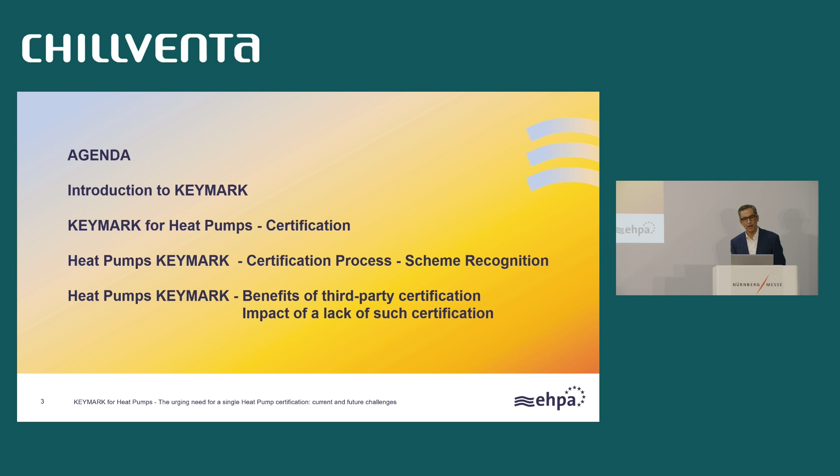We are going to speak about certification today and the importance of certification in the context of having a larger and wider European market, so it's important to align as much as we can. To illustrate certification, I will speak about the KEYMARK as a brand, what the KEYMARK concept is, and then specifically about the KEYMARK for the heat pump sector. I will then explain briefly the certification process and the scheme recognition, and then we'll jump to the benefits of third-party certification and the impact of a lack of such certifications.

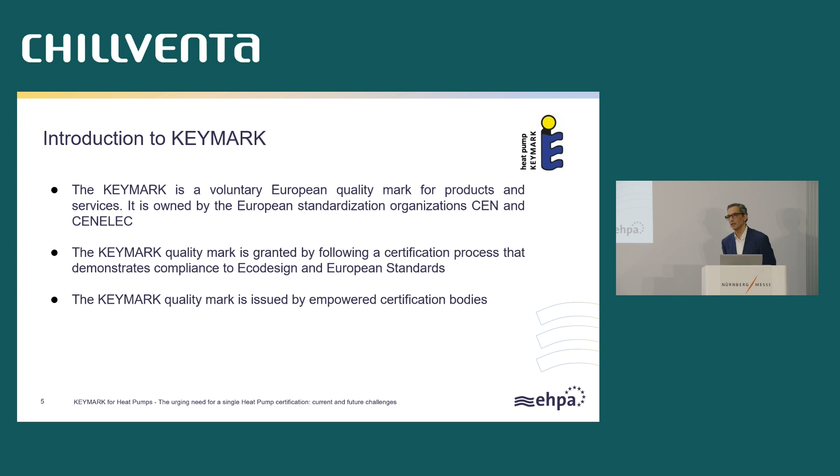So what you need to know about the KEYMARK: it's a voluntary scheme, a European quality mark for products and services, owned by the European Standardization Organization. The quality mark is granted not just as a piece of paper, but following a certification process that will demonstrate compliance to eco-design and European standards, and this compliance will be delivered by an empowered certification body.

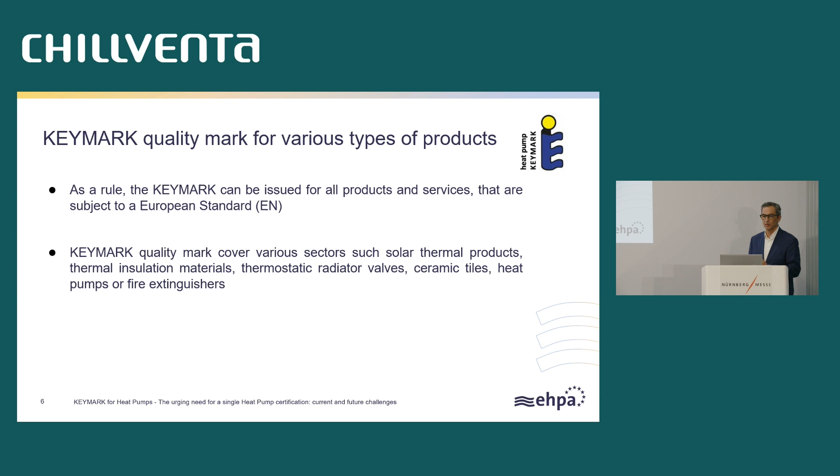The KEYMARK, when it was developed almost two decades ago, was really meant to cover any product or even a service. The only condition for the KEYMARK to be established is that there is a European standard that can cover the specific product or service. As a result, the quality program KEYMARK covers different products - it can be a valve, a radiator valve, solar equipment, insulation equipment, and of course, heat pumps.

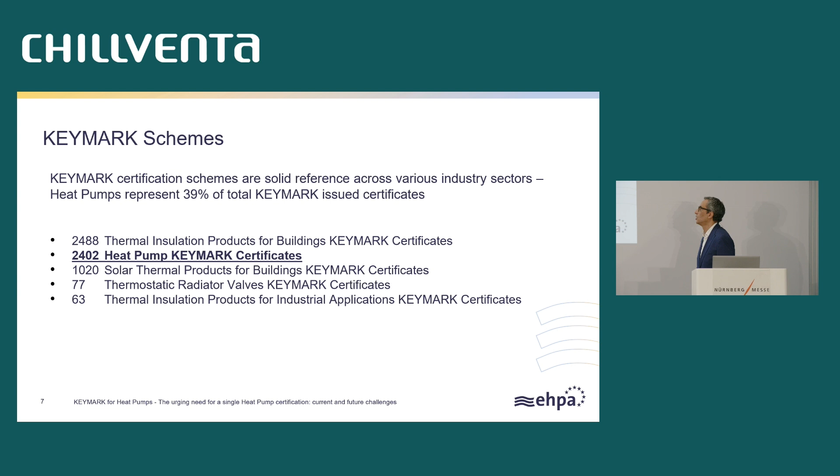Today the KEYMARK is quite developed. It was implemented by CEN and CENELEC two decades ago, and today we have thermal insulation and the heat pump KEYMARK, which is catching up and almost passing thermal insulation in terms of number of certificates issued. So the KEYMARK is very strong for our sector in heat pumps. We also have solar thermal products, thermostatic radiator valves, and thermal insulation.

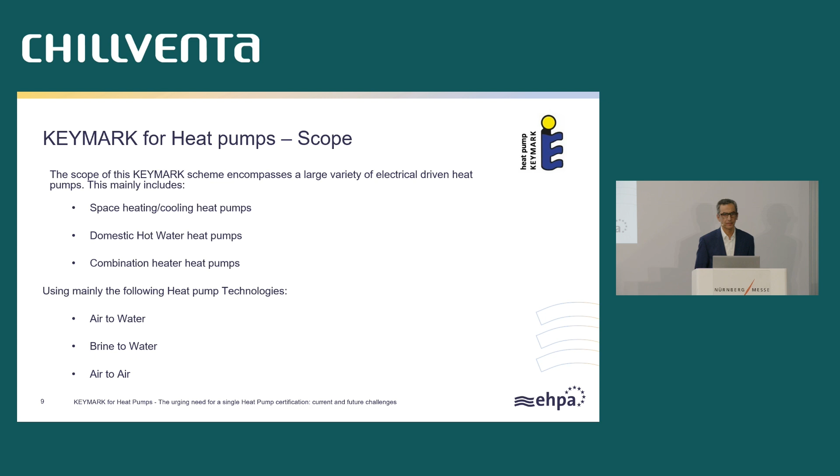In general, the testing types - we will see the standards we refer to in the KEYMARK - but the testing in general, performed through third-party testing, needs to be compliant with the requirements of Eco-Design Lot 1, 2, and 10. Depending on the application and type of heat pump, you can have specific tests about space heating, space cooling, hot water tests, sound power tests, and operating tests.

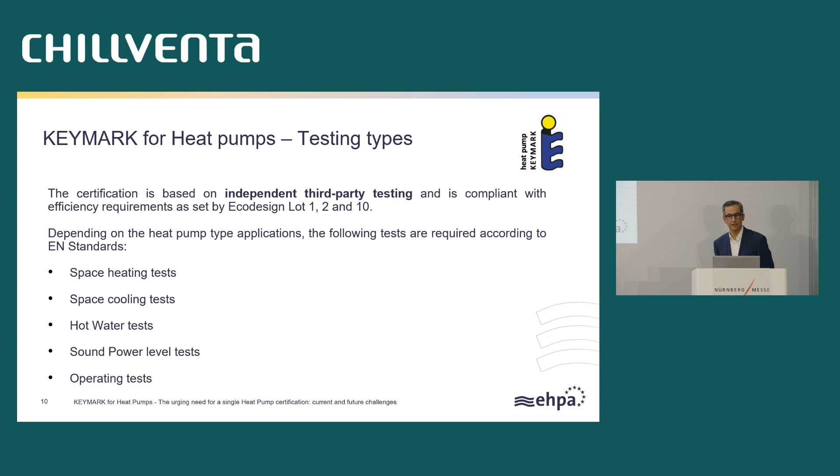As I said earlier, these tests are conducted by laboratories that are ISO 17025 accredited. So only accredited laboratories empowered by certification bodies can do the tests and have their test reports valid. For certification bodies who are accrediting the laboratories, the certification body needs to be ISO 17065.

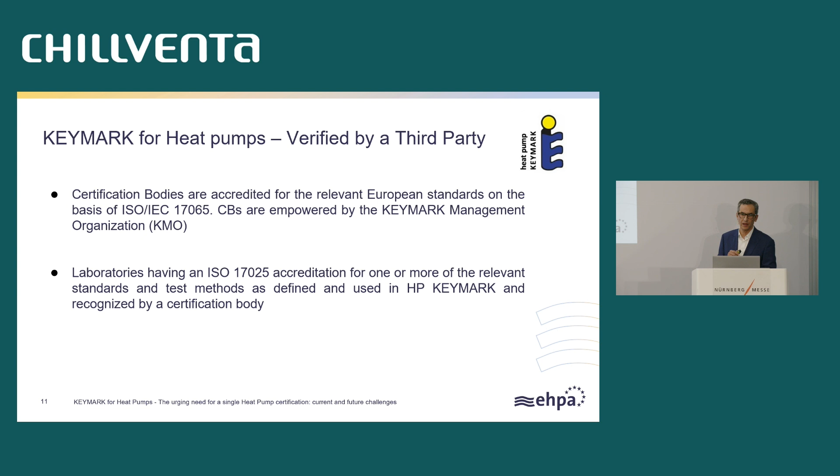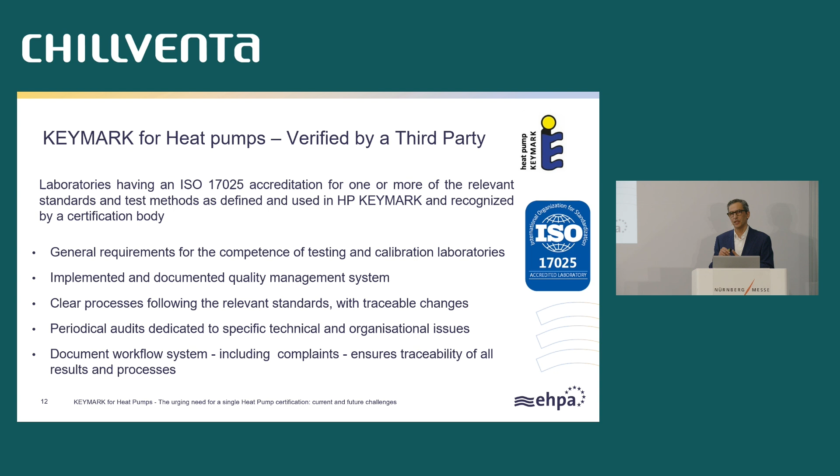For specifically the laboratories used in the KEYMARK scheme, they are 17025 certified, and they go through different processes as dictated by ISO 17025. They need to go through competencies, calibration of the laboratories, documentation, traceability of the test reports, and all documentation regarding complaints.

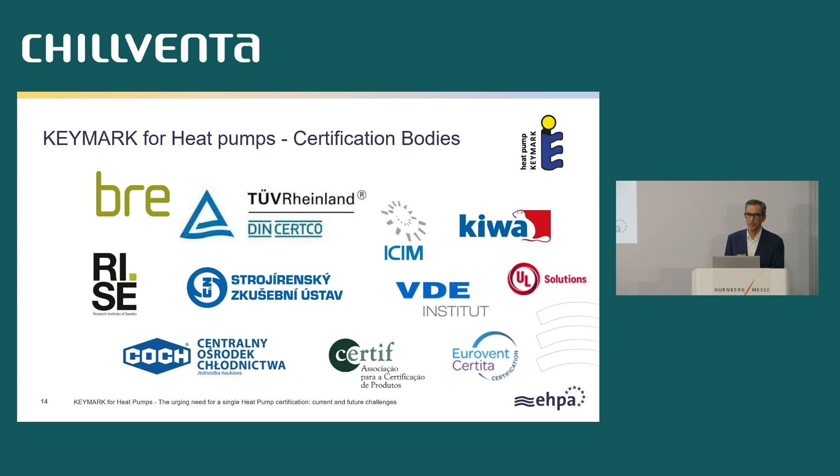All this is required for each lab performing testing for the heat pump KEYMARK certification according to ISO 17025. Today we have 29 laboratories, and the decisions are made by 11 certification bodies, which are around Europe and only in Europe - you need to be implemented in Europe to be designated as a certification body. The laboratories, however, are global, so a laboratory can be in Europe or outside Europe, but it still needs to be empowered and accredited by a certification body, and of course be ISO 17025 compliant.

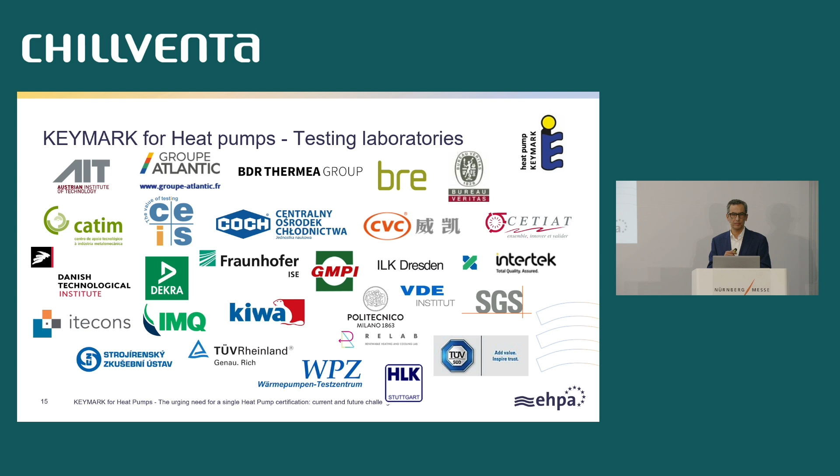In terms of results of all this setup of KeyMark, we have today more than 169 certificate holders. We have more than 2,400 certificates, and we have more than 9,000 models of heat pumps that are already on the market and certified, and most of all, monitored year after year about their quality and their performance.

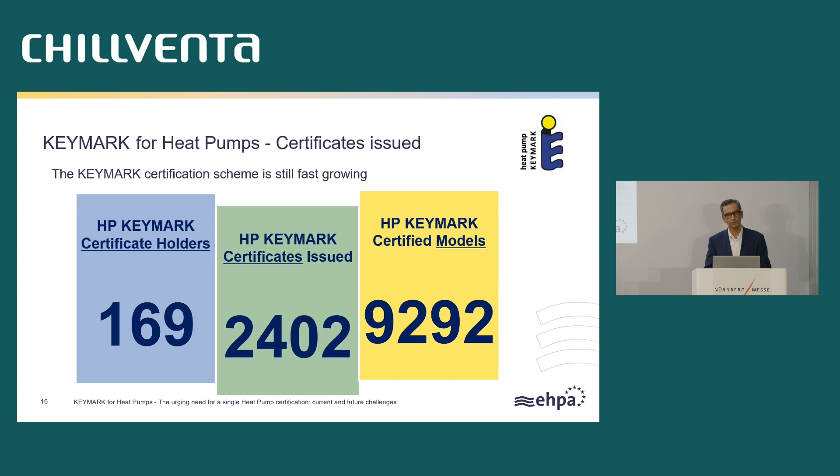So the KeyMark is managed by different groups. We have the scheme group, the steering committee group, and we have the secretariat for the KeyMark. And from these groups, the scheme group, the steering committee, we have a representation of manufacturers, testing laboratories, certification bodies, and we have also representation from the European Heat Pump Association.

So all these groups are still, at the end, supervised by the CEN, and it's called the KeyMark Management Organization, KMO, on behalf of CEN, that are monitoring the activities of these groups. And when there is, for example, a modification in the rules, the CEN has to approve this modification of a rule, of any rule.

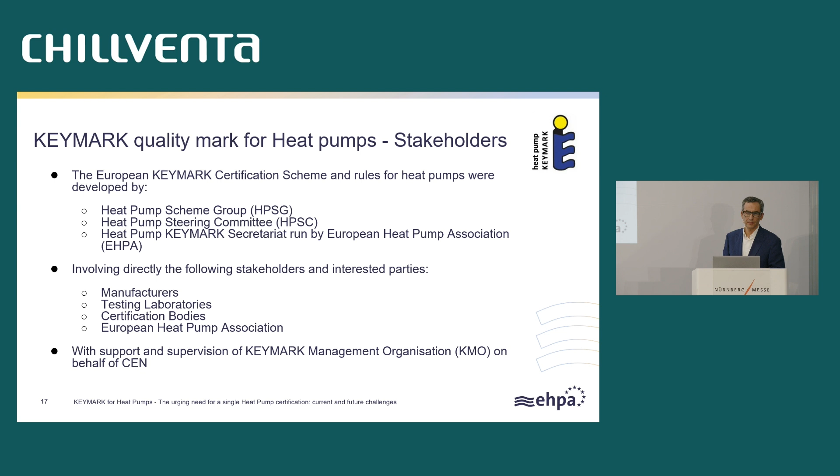So now the KeyMark, the certification process and the recognition. So the certification process for the KeyMark is a classical process. This is a third-party certification where you start to apply, and you approach a certification body, you approach a testing lab, then there will be a decision on how to organize the family of products in types and subtypes.

To do the testing. Then an audit, because there is an audit, so there is a factory on-site inspection, and during this audit we will designate the samples to be tested and to be shipped to the laboratory.

Then the laboratory will make the tests and present the test report to the certification body. The auditor will present also the audit report, and the certification body will review the test report and the audit report and make the certification decision. So this is the classical certification process for a heat pump KeyMark.

What is important to mention is that point number 5 is that there is an annual monitoring. So every year we will have to proceed to an on-site inspection of the production location. We will also proceed to some testing, depending how the testing was agreed with the certification body and the test laboratory. You may need to do some other testing through the process.

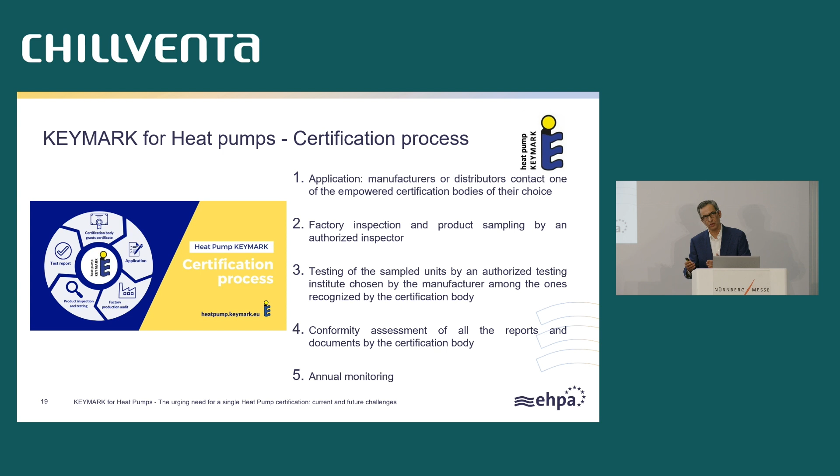As a manufacturer, you will have to introduce some data of your equipment into the database. This data will be compared to the test results and will be reviewed by the certification body. There is also within the database a verification tool to see if there is any inconsistency. So there is no data in the database that is not consistent, verified or checked according to a test in the lab. So this is very important to know.

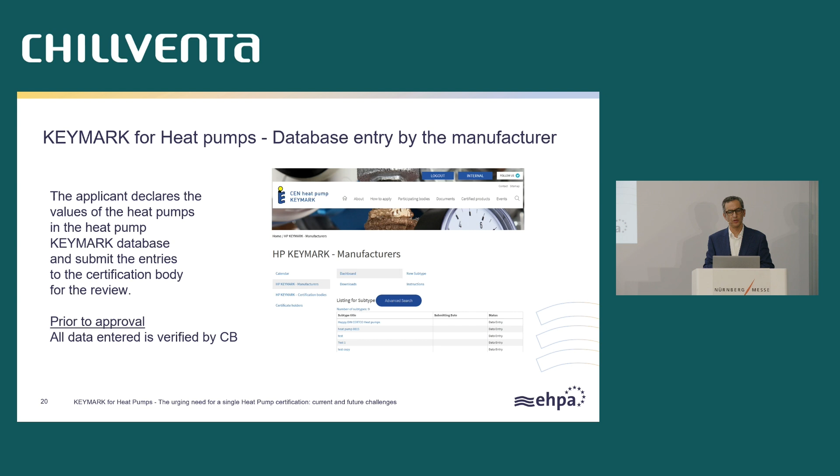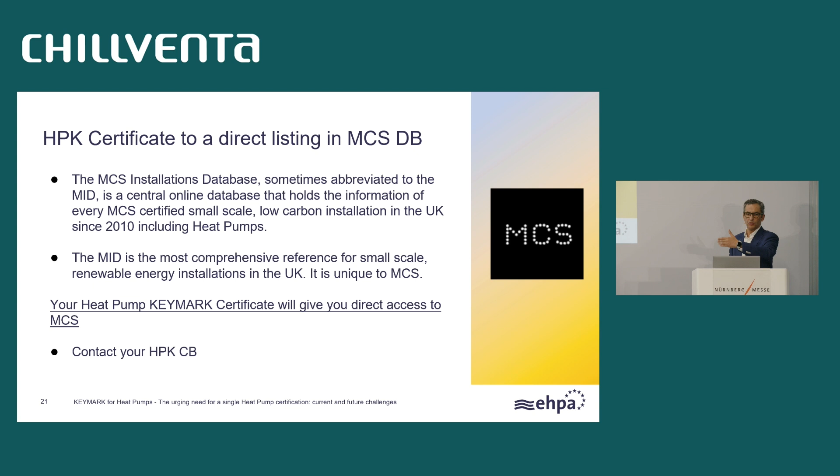So as part of the recognition, we have, for example, this direct recognition for MCS for the UK, this database. So when you obtain your KeyMark certification, you can immediately upload all your certified products' characteristics to the database, and it is recognized for subsidies in the UK.

The same with quality label. You have also a direct recognition of the KeyMark from the quality label. We had in the past a lot of discussions about how to recognize, but now there is a clear alignment of what the quality label national commissions and committees are asking, in terms of reports, in terms of information related to the products. So there is a clear alignment. So with your KeyMark, you can go and ask for a quality label.

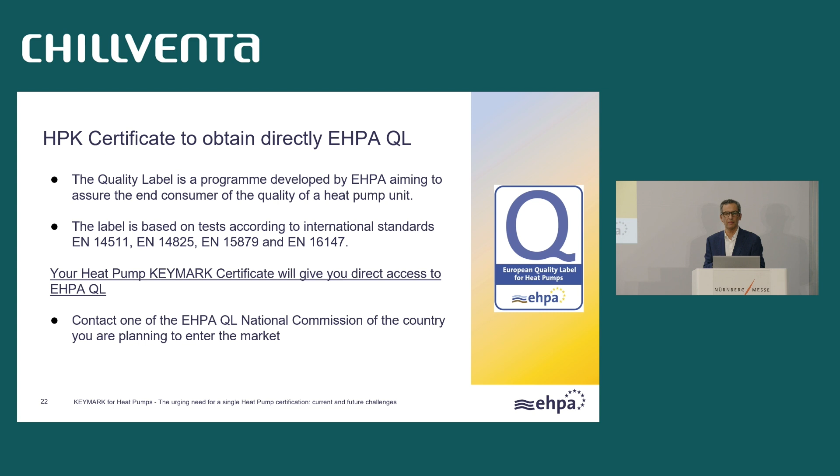For your information, we have a webinar in October, the 24th, where we are going to compare, we will make a parallel between the KeyMark and the quality label to avoid any confusion, to make sure that you understand that these are complementary and that the KeyMark recognizes the quality label, because we know that in some markets, the quality label is required.

So in terms of recognition, what is important to understand, if you followed some of my previous presentations in the past, I was referring to recognition, but now I say reference. So it means that some countries are referring to KeyMark when it is needed. So when it is not needed, it doesn't mean that KeyMark is not recognized. So it is very important to understand it's a reference.

So some countries, to not pick on Poland, are referring today to the KeyMark. And maybe in the future they will not need it anymore. So they will not refer to it.

As far as a country or a scheme or a subsidy scheme looking for a third-party certification, they can refer to Key Mark, because Key Mark is not a text of law. It's not a directive, it's a voluntary scheme. So when a quality third party is needed to support a scheme, an initiative, or a regulation in the future, they can refer to the Key Mark. Today, if you pick Italy, it's not referring to Key Mark, because there is no need today in Italy. They didn't decide to regulate or develop a subsidy scheme referring to a third party.

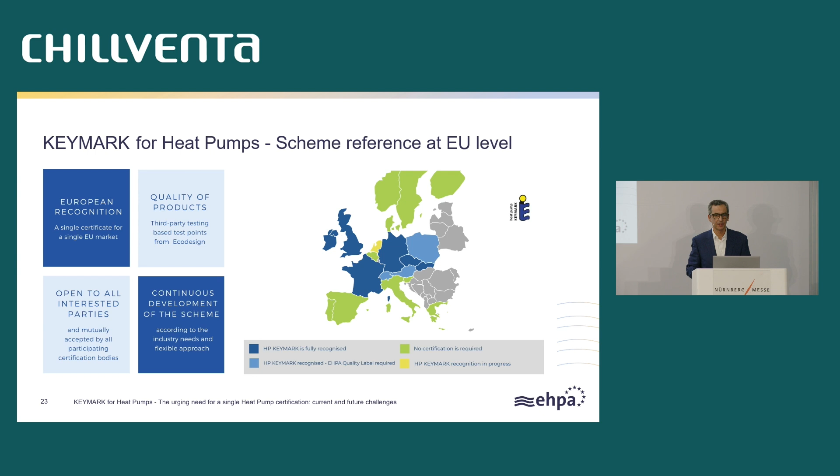In terms of benefits of certification, if we look at the global picture, we can call it a conformity assessment. A conformity assessment can be an audit, a testing, a validation, a verification, or a certification. It's clear that applying conformity assessments to products like heat pumps can only increase the trust and confidence that is required or desired. This is very important, and a conformity assessment can only enable market access for a business, whether large or small.

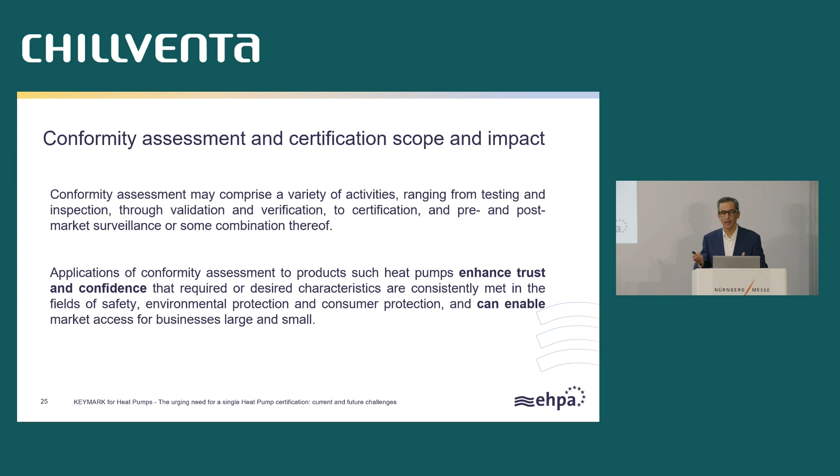So now we ask: what does a non-harmonized certification mean to an industry sector? If we align to a common certification scheme, the industry is exposed equally — we are referring to an equal set of global and harmonized requirements. If you refer to a common certification, all manufacturers for a specific region or country will use the same reference.

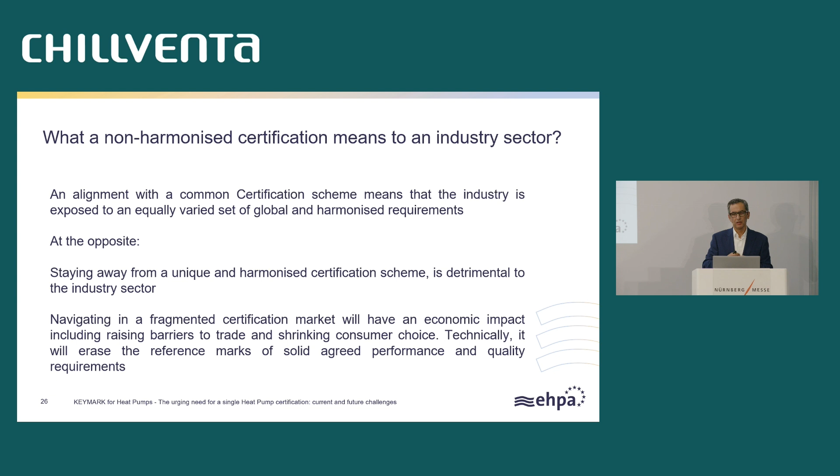At the opposite, if we stay away from a unique harmonized certification scheme, this will create problems for the industry sector. If we go into a fragmented certification market, the impact will be important — economic impact. We will raise barriers, have difficulties circulating goods, and the consumer will be impacted as well, because there is less choice for the consumer to choose equipment. At our level, for certification bodies, it will lower the reference marks of solid, agreed performance and quality requirements, because every country or region will start to develop their own requirements, and this is detrimental to the sector.

So as a summary, common, harmonized certification will benefit both users and businesses. For the users, as I said before, it gives an opportunity for the end user to choose and compare products, because all certified products were certified against the same criteria, so they can easily choose. If there is the mark or logo that is Key Mark certified, he or she knows that the equipment was tested the same way.

So he can really look and think about his choice with confidence. And most important for the end user, buying equipment that is certified gives confidence that the product is of quality, that it will perform the claims the manufacturer makes on the package or in advertising. This is very important for the consumer and user. We know that the consumer is ready to pay up to 25% more for a product that is certified.

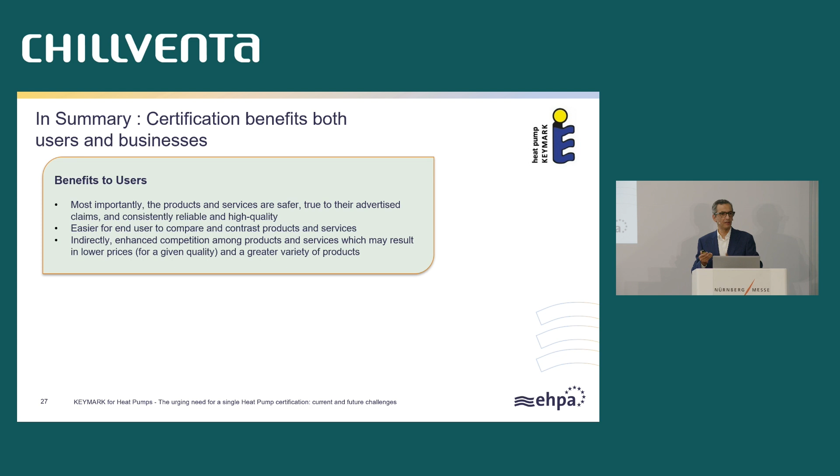For the businesses, it's clear the advantage is that they can be compliant with regulation. We know eco-design updates are coming, and energy performance in buildings will also be discussed. So we need to make sure manufacturers refer to the same common, aligned certification scheme — otherwise it will be very complicated. And again, for the manufacturer, certification enables market entry because they are certified. So this is also important.

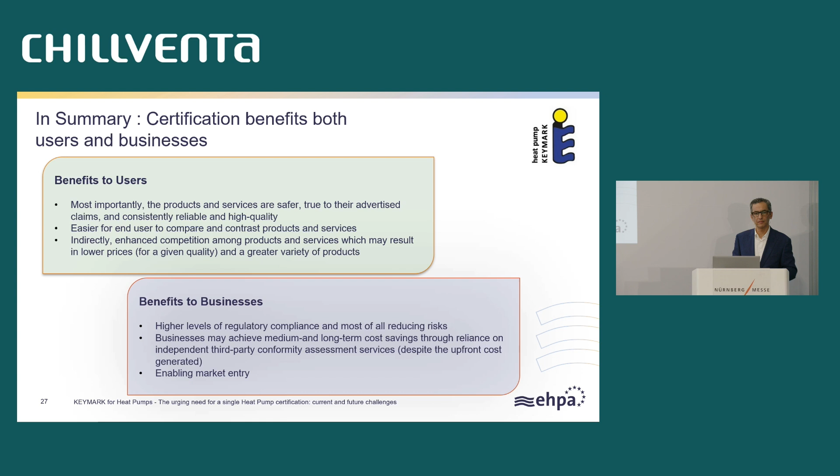The last point for businesses is third-party independent conformity. We always see certification as a cost, but we never see the long-term impact of a certified, on-site, regularly audited manufacturing location. We look at certification as a cost, but we need to look at it the completely opposite way, long-term. So this is my conclusion for my presentation. Thank you, thank you for listening to me.